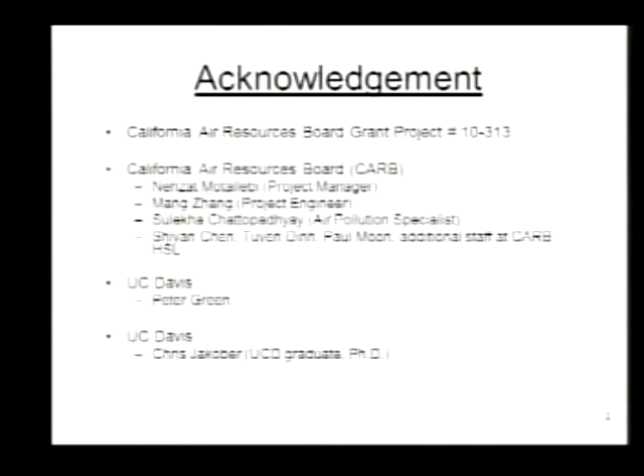I'm going to focus on results that have been published or are in the process of being published through this project. There are 7 or 8 papers here. I'll focus mostly on the results from paper number 4, but I'll touch on elements of some other papers as well — I just can't stuff it all into a one-hour seminar and do it justice.

Some of these things, obviously, my colleagues would be better suited to give the seminar on than I would, so I'll defer to them on questions about the details of the AMS, although I will touch on some of the interesting issues that came up with that technique as we go through this.

Just by way of framing this — I think everybody here is pretty tuned into this, but maybe some folks on the net would benefit from a little background. There's been work in the past decade looking at the volatility of primary organic aerosol. The idea is that primary organic aerosol is not rocks — it's actually semi-volatile material, perhaps. Especially if you measure it in very high concentrations, you push more of that semi-volatile stuff into the condensed phase. Back in the 90s, we didn't really recognize this about organic aerosols.

Glen's wisdom, and kind of genius in the whole thing, in developing the dilution sampler was that you try to get things down to ambient concentrations so that you can measure stuff with the normal ambient sampling equipment. That's actually something that has served us very well throughout many, many years of studies: don't study a system at industrial concentrations and somehow think you're smart enough to project what it means into the ambient. Try to get it as close to ambient as you can, and then measure it with the same techniques that you use for ambient — you'll skip a lot of complexity out of this.

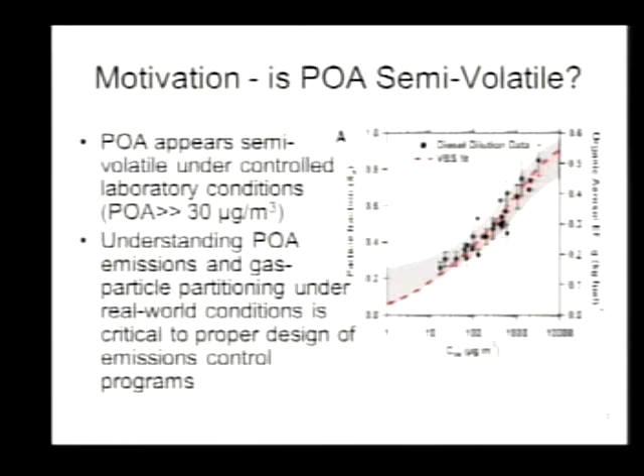So the question became: maybe all primary organic aerosol is semi-volatile, and you're just wasting your time measuring primary organic aerosol, period, and the game is all in the secondary phase, not the primary phase. We didn't think that was realistic. You can actually see the data kind of flattening out, and we had made a lot of measurements that didn't seem to go along with that theory.

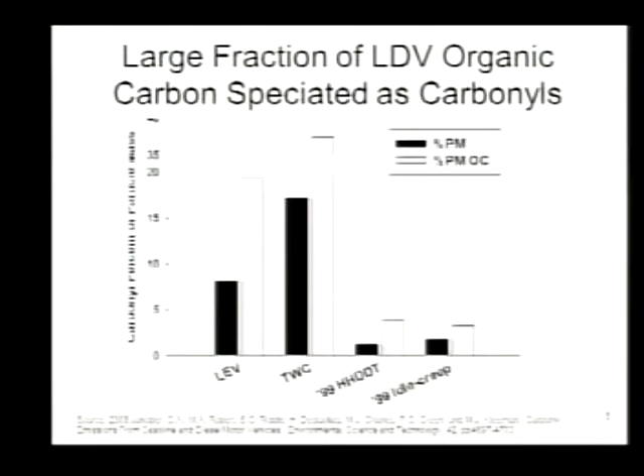So that was the motivation for this project. In previous work in 2002 and 2003, we were working at El Monte under ARB sponsorship, measuring emissions from motor vehicles. Lots of people, even in this room, were involved either directly or indirectly with that. We thought we could actually chemically speciate a significant fraction of the organic aerosol. We were working at pretty low concentrations, and we thought we could account for the chemical speciation of roughly 30% of that organic aerosol.

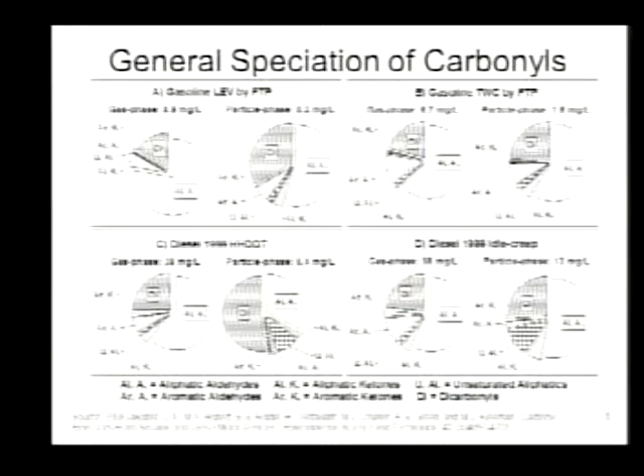When we looked at the chemical composition, it was a lot of oxygenated material: aliphatic aldehydes, dicarbonyls, some aromatics back then, but not as many. We looked at the partitioning of that, trying to think whether it would follow the absorption model where you'd expect it to evaporate. What we found is that it just didn't seem to follow the absorption model, period, let alone whether it would evaporate or not. It shouldn't have been in the condensed phase in the first place.

That suggested to us very strongly that absorption, at these low concentrations, doesn't explain what's going on. Perhaps adsorption, like a surface bonding process, or some other chemical speciation process was going on. Our best explanation for this result, with these light carbonyls being in the condensed phase, was that they don't exist in the condensed phase in that form. They're actually tied up in some equilibrium system where they form dimers or trimers or some other complicated structure. When we do our chemical analysis, we use a derivatizing agent that pulls everything back towards the building blocks, basically. So we can speciate it because we've pulled it back apart. It was really the more complicated forms that were in the condensed phase out of the tailpipe.

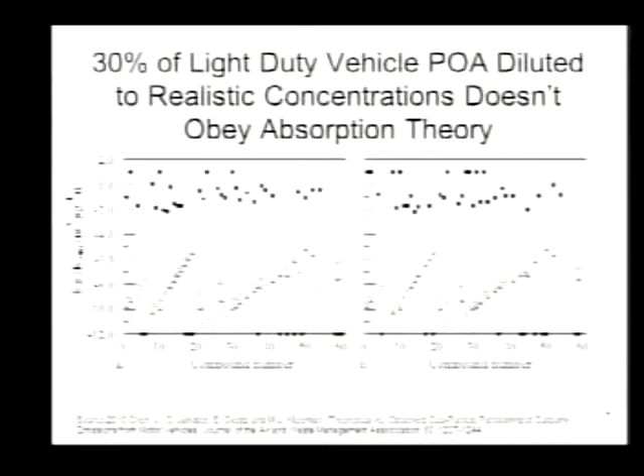So we wanted to test that theory and see whether we could recreate those results, get a lot of light carbonyls, find them in the condensed phase again, and then this time look very specifically at whether or not we'd expect them to evaporate under different conditions. That's the experiment we tried to design.

Now, that's hard because you're working at very low concentrations. People make measurements at 100 micrograms or a few hundred micrograms because it's really easy to measure stuff at that range. You drive it down to 5 or 10 micrograms per cubic meter in a dilution sampler, and suddenly you're running 30 FTP cycles trying to get enough mass. Nehzat remembers this - we just kept going day after day trying to get enough mass because we wanted a realistic dilution factor, but we still needed enough stuff to chemically speciate.

So it's detection limit challenges - those are really challenging experiments to run. But nevertheless, we think you really want to run your measurements close to where it lives in the atmosphere. You don't want to do some industrial chemistry measurements and then somehow think you know how to project it in the atmosphere.

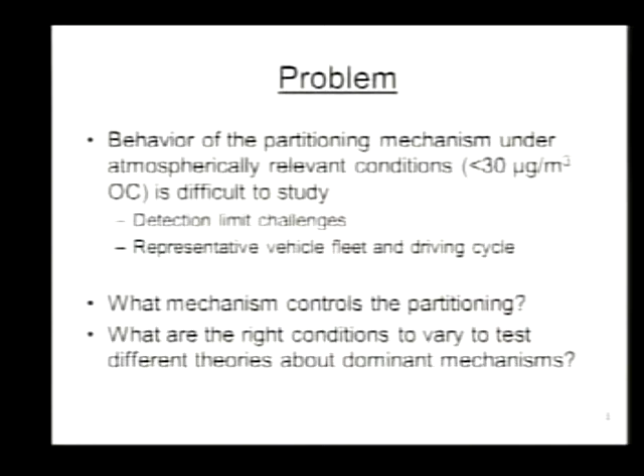So we really felt strongly we needed to get there. And then we wanted to understand what controls the partitioning. What are the mechanisms? Is it absorption? Is it adsorption? Is it chemistry? Or is it something else?

So the experiment we designed was to have a test matrix with 4 boxes. We varied the relative humidity and the black carbon content of the dilution air mixed into the samples. Before, when we did this, we just cleaned up the dilution air, made sure it's particle and gas free, mixed it with the hot exhaust, got it to close to an ambient concentration, and called it good.

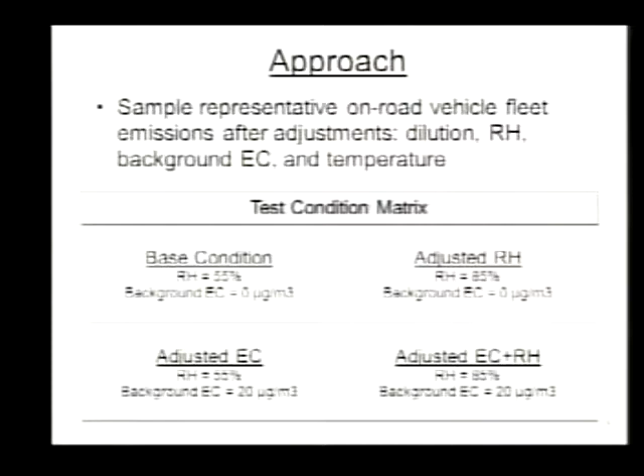But now if we want to understand the partitioning, we want to add some black carbon to that dilution air, provide some surface area for these things to adsorb onto, and see whether or not we pull more stuff into the condensed phase. Or perturb the humidity of the system and see if it cares about water. The other thing we were doing is varying the temperature. Every one of these 4 boxes also had multiple temperature measurements: ambient temperature, and 25, 50, or 75 above ambient, to watch how the system behaved. We were hoping that by varying these 3 things in concert, we'd get insight into what was going on with this system, and whether it's true that all this primary organic aerosol is going to evaporate at ambient conditions.

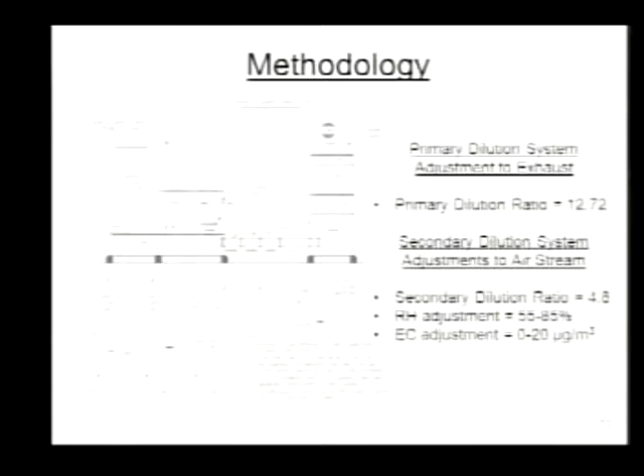We had a whole host of state-of-the-science equipment measuring what was happening at the tail end of this. We had the traditional denuder filter PUF collection measurements, followed by derivatization and GCMS - that's wet chemistry, pretty well established now. We had a high-resolution AMS system measuring this. We had a real-time photoacoustic measurement of the black carbon content. We had a real-time chemical ionization mass spectrometer to measure some of the gas phase, just trying to understand what was going on. So we really went in there throwing the kitchen sink at it, trying to hit it with everything we could, perturb it in interesting ways, and watch what happened.

And again, I can't touch on all these results, but I'll try to highlight the important bits for the storyline that I want to develop here.

This is just a picture of some of the equipment in action. On the left, you're seeing the denuder filter PUF systems. We use denuders in series to make sure we don't have any breakthrough, followed by the filter and PUF type measurements. You're seeing details of the car and the dynamometer. And in this right panel, you can see the flame generator - an inverted laminar flame generator to generate soot. We were trying to inject about 5 micrograms of soot, but we couldn't completely control the system exactly where we wanted it, so we ended up injecting about 15 or 20 micrograms. But that should only make it easier to see an adsorption effect where we're bringing stuff in.

And then we had some cascade impactor measurements as well. The left-hand side shows a MOUDI impactor that was collecting samples from the setup.

So again, this was an experiment we had done before, and we focused on low-emission vehicle technology. These cars were 10 to 11 years old at the time we ran the experiments, which actually matches pretty well with the fleet average in the United States - I think it's something like 10 or 11 years old. So we were pretty close to being relevant and realistic in this. Now, if you go out on a highway or in a tunnel, you'll see a much broader range of vehicles, and some of those emit pretty high, which can push things around. I'll get to this in the end in the recommendations. By no means do I think this is the exhaustive end of the study.

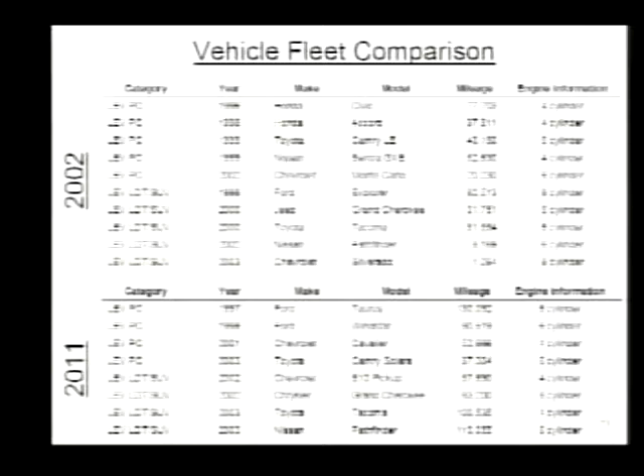And then the fuel changed. We still had MTBE in the fuel, I think, back in 2002, and we basically replaced that with ethanol. And you're going to see some of that change the Carbonyl Speciation later on. You can actually see that in the results. So, and I think it makes sense.

All right, I've kind of already run through the analytical methods, so I won't belabor that, but we had everything from the traditional to the very, very cutting edge and new, basically. Traditional stuff, not real time, and the cutting edge stuff, real time. Takes a year to invert the data, but you get real time information after you go through that process.

All right, so just to put things in context, when you dilute it down to ambient concentrations, 5 micrograms per cubic meter or less, what does the carbon look like being emitted from the tailpipe? So these are size distributions. There's particle diameter on the lower axis, and there's concentration of mass on the vertical axis.

The black is the elemental carbon. So it's the carbon, nobody's fighting about that. That's black carbon that is not volatile, it's not going anywhere, and it is the majority of the carbon in the system at realistic concentrations. If you leave this at 100 or 200 or 300 micrograms, that's a different story.

You'll see far more organic carbon per unit of elemental carbon in the system. But if you get it down to something that's atmospherically relevant, it's mostly already, that evaporation process has happened. The question is, does this last little bit evaporate? And that's what we're fighting about, or having a spirited conversation about, I should say.

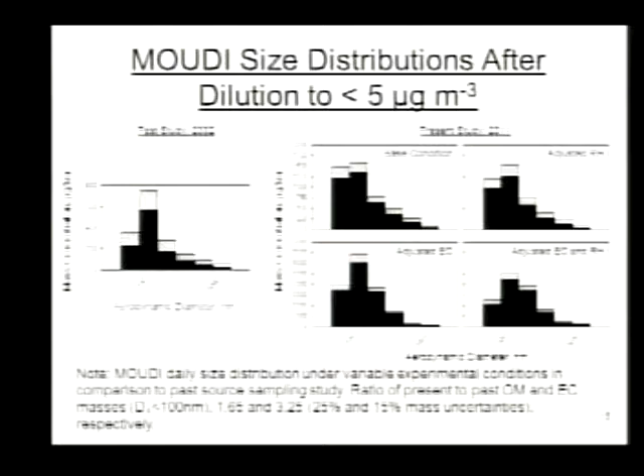So the measurements from 2002 on the left panel, and then the more recent measurements on the right panel, looking at the base condition, or the condition where we increased the relative humidity, or we adjusted the elemental carbon in the system, or we did both in the lower right-hand panel. And the story largely stays the same in terms of there's not a lot of organic carbon there to start with. The question is, can we push it around at all through these various modifications of the diluter?

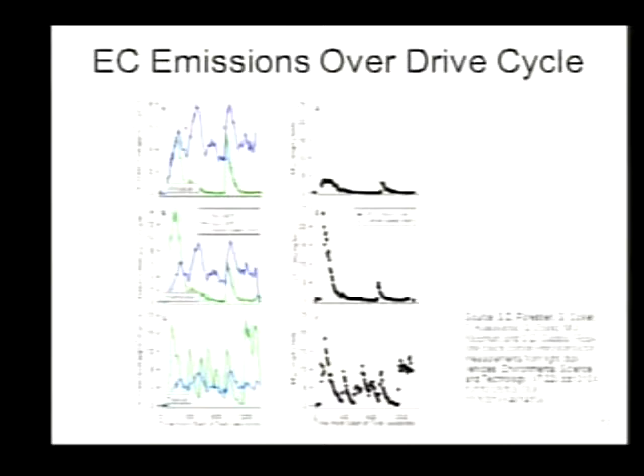Dynamometer tests are hard because you can't get a large fleet in there, and there's a lot of vehicle-to-vehicle variability. But you go out to a roadside or a tunnel, and you get a lot more vehicles, but they're all driving pretty much the same speed, same time—is that representative of what you're trying to look at as well? Everything has its strengths and weaknesses, and you should look at the weight of evidence from all the different studies before you try to draw strong conclusions about what's happening.

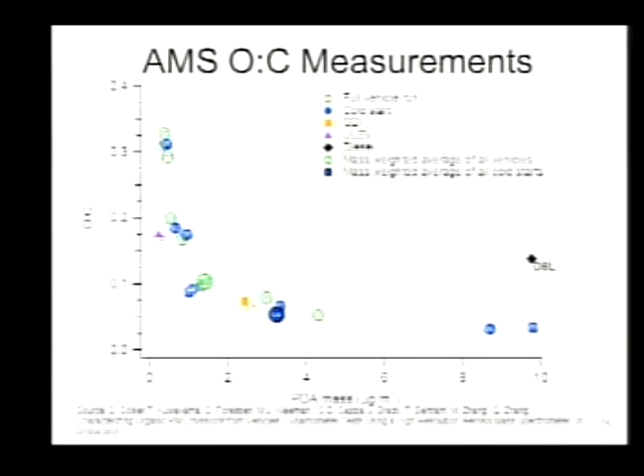We're definitely still trying to find all the important points in this data set, but this jumped out at me as something that was very interesting and relevant.

While we're talking about the AMS—this is an instrument that has sort of revolutionized our measurements of organic aerosol in the past years. These Van Krevelen plots, or various types of plots where you can look at the speciation and the real-time concentration with this instrument, have really drawn a lot of attention from the field, a lot of publications and effort gone into making these measurements.

One theory that hasn't been shot down yet is that the AMS defines organic carbon as anything that will volatilize after a few seconds at 600 degrees Celsius in their system, under vacuum. Anything that doesn't evaporate then is classified as not organic carbon. That's not how the traditional technique works—the traditional technique ramps the temperature in the EC-OC analyzer higher, like 800 degrees or so, before bringing it back down, then adds oxygen to the system to try to measure the elemental carbon. So there's a possibility the AMS is not able to measure what I call the very non-volatile carbon in the system, or not measure all of it.

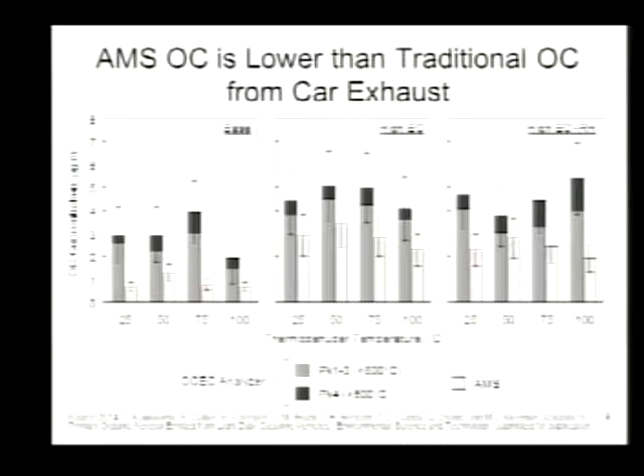Now, looking at this, the AMS crowd was quick to point out, well, maybe your measurements are wrong—maybe we're right and you're wrong. And I take that to heart; I have to consider that possibility. So we went around and tried to compare and cross-check everything that we could. We had measurements, you might recall, with that MOUDI impactor. A MOUDI impactor measures carbon using an aluminum foil substrate to collect samples. That aluminum foil substrate doesn't have a lot of surface area in it—you know, we're measuring with the quartz fiber filter.

That has a tremendous amount of surface area, and you always worry about positive adsorption artifacts of the gas phase vapor onto that. But we were running 2 denuders upstream of our quartz filters, so in theory the denuders would have stripped out all the gas phase material, and we wouldn't have to worry about this.

I think in an ambient sample, where you have a whole bunch of different sources contributing to the sample, it may well be flawless or close to flawless. From this particular source, it looks like it might have some issues. That's just a word of caution about how to interpret your results. It probably can be fixed - everything can be fixed - but it's just a question that needs to be looked at.

We actually worked this backwards, but I'll tell it going forward. So one of the things to understand is how did our fleet compare to their fleet in terms of emissions rates, if we want to understand what they measured versus what we measured. So what I'm showing on the left-hand panel here is the Carnegie Mellon fleet of 8 vehicles, or 7 vehicles, that they did their POA volatility experiments with. It's the natural, or the log 10 emissions rate on the lower axis for the different vehicles - this is like a distribution of how those vehicles looked.

The open bars in the background are results from the Kansas City study - this is a US EPA sponsored study out of Kansas City where they had a very large fleet and characterized the emissions from that very large fleet. So we were curious of where we stack up on this.

What you can see is that half the Carnegie Mellon fleet used in this study emitted more than 10 milligrams per mile, which is on the upper end of what US EPA characterized from a national perspective. We actually wrote a test plan where we would not allow a vehicle emitting more than 10 milligrams per mile into our fleet. So half the vehicles here we would have called high emitters and would not have allowed into our fleet.

Our fleet is characterized on the right-hand side, and you can see it's the same open bars, the same Kansas City national fleet in the background, but our vehicles fell into the lower third of that national snapshot. So you might expect we're going to get different answers because we started with very different vehicle fleets, and that's indeed going to turn out to be partially true in how we characterize this.

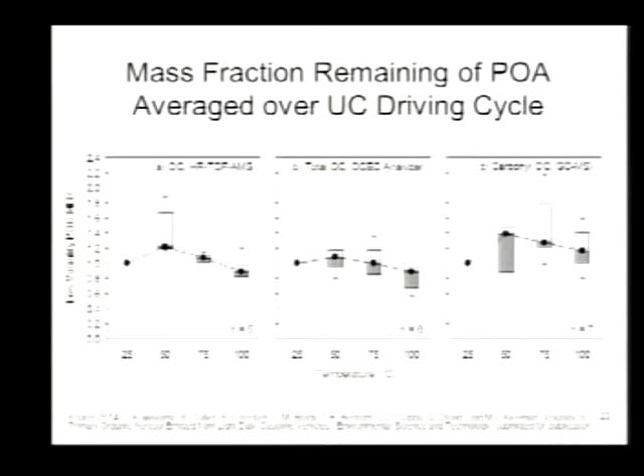Now this is a little bit misleading. We designed the residence time at that temperature based on previously published results, which turned out to be not very accurate or representative of ambient conditions. We probably could have benefited from a higher residence time in the hot temperature zone of this experiment. We're going to have to use models to project what would have happened if we'd left it at that hotter temperature for a longer period.

Before we do that, I want to look at results as a function of the driving cycle phase. We also have AMS results throughout that driving cycle. The UC driving cycle is about 20 minutes long, with cold start, accelerations, and so on. We used the first couple phases, so we know something about the cold start phase and about the later phases when the vehicle warms up.

The middle panel here is the AMS measurement of organic aerosol mass. A lot more organic aerosol mass comes out in the cold start portion of the driving cycle, then things settle down, but not to zero in the hot running portion. Then looking at mass fraction remaining at the four different temperatures from those different phases, you can see the particles look more semi-volatile during cold start than during hot running. There are probably some composition changes that explain that, but basically during cold start those particles are more amenable to evaporating than during the hot running portion of the driving cycle.

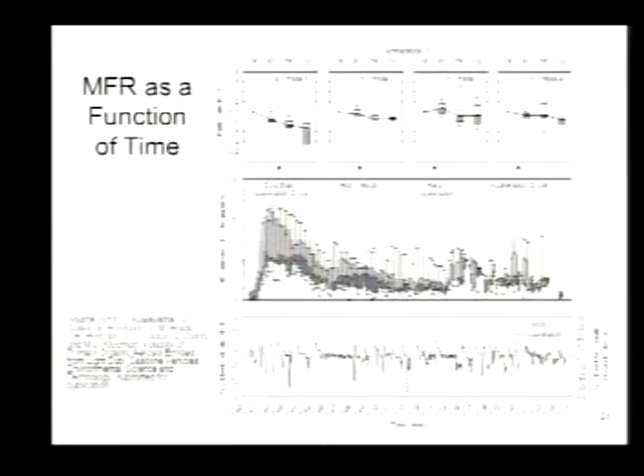All right, so we're going to try to model this now. One of our goals was not just to observe it, but to put a framework around it for how we can explain it and how we might put it into regional models. So what's the kernel of that? Well, a lot of the community has been trying to describe aerosol volatility with the volatility basis set.

You describe a whole series of different particle volatility bins—some very semi-volatile material, some less volatile material, and so on, a continuum of possibilities. The material that appears at the far right side of these plots, where C star is very, very high, is very semi-volatile material.

It wants to be in the gas phase more than it wants to be in the condensed phase. The things that appear at the left side of this plot at low C star values is very low volatility material. Chris is laughing at me because I made him express this as one over KP for about 3 years, but it's the same thing. So I'm converted now. I'm using C star.

So you've got a description then of whatever source that you're looking at. We're going to try to explain our data using not one volatility basis for the primary organic aerosol, but 2, because we think that there are 2 different types of organic carbon being emitted from this vehicle. And it's not hard to guess.

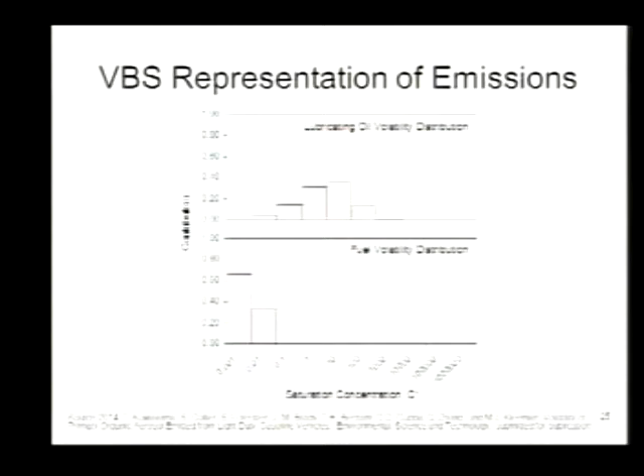So what we're going to see is that our representation of that volatility distribution involves some very, very low volatility material, which we think is fuel combustion products, and then we have lubricating oil, which has been measured sort of independently. Its volatility basis set has been measured, and this is how we're going to try to explain our data.

So when we do that, we get a picture that looks something like this. So this is the different temperatures, again, on the lower part of the plot, and then the mass fraction remaining on the vertical part of the plot. And I'm taking all the vehicles that we tested, and I'm making a box and whisker plot of them at each temperature. So that's what the distribution looks like at each temperature.

And we're trying to see how well the model is able to recreate that. The 2 lines are what you would get if you use the Carnegie Mellon sort of representation, a single volatility distribution to represent the results. And depending on the assumptions that you make about the particle surface area, the particle diameter, the residence time, and blah, blah, blah, you can get either the blue line or the red line. It sort of changes a little bit, but your answer is somewhat in the median there.

And you would anticipate then that you could get almost complete evaporation of that material as you go to hot enough temperatures. What we sort of focused on in our reanalysis of this data, our measurements using that Carnegie Mellon single volatility distribution model are on the left. Reanalyzing the Carnegie Mellon data is on the right. You get the same sort of picture out of this.

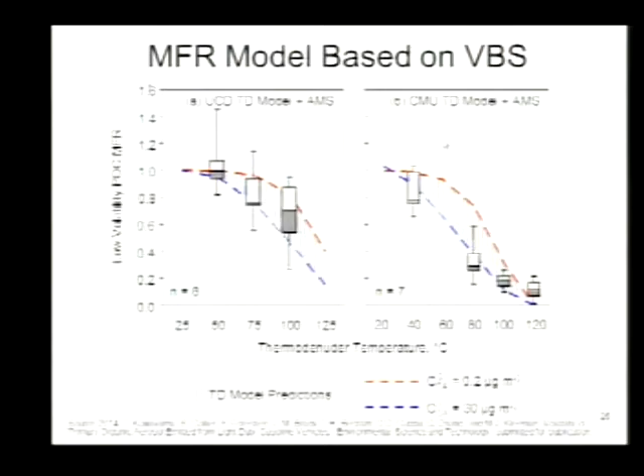But what we focused on was that model doesn't do a very good job of reproducing the scatter. Yeah, that might explain what the median vehicle does, but there is no median vehicle. We cannot explain the scatter in the data with a model that uses one volatility basis set to describe the POA from tailpipes. And so what we ended up doing is using our 2 volatility basis set, and that worked a lot better.

And the easiest way to sort of quantify or describe how much better it worked is just to draw the mass fraction remaining that was observed versus the predicted mass fraction remaining using a 1 distribution model or a 2 distribution model, and look at R squared. How well does it recreate the data? If you use a 1 distribution model, which is shown here on the left-hand side, you get an R squared of about 0.52, which isn't so hot, obviously.

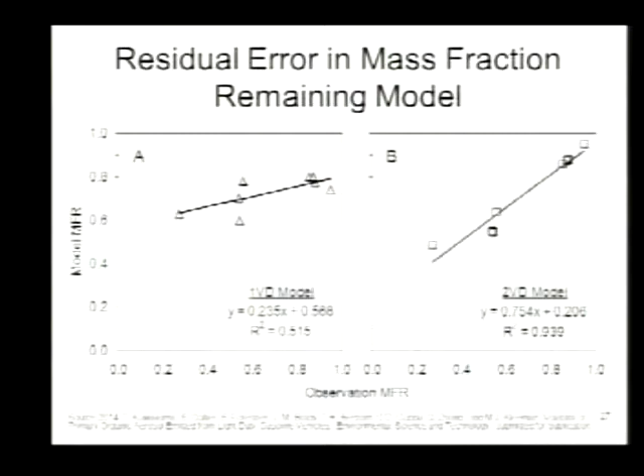If you use that 2 volatility distribution set, you get an R squared of about 0.94, which starts to look a little bit more convincing in terms of what's going on. So you cannot capture the full range of behavior for POA volatility with a one volatility distribution model, basically. And that comes out in the vehicles as well.

The interesting bit, why do we get 0.94 and not 1? Well, it turns out that in some of these experiments, as you heat the aerosol up, you actually get more organic carbon in the condensed phase, not less organic carbon in the condensed phase. And that does not jive with absorption theory at all. I mean, those models with the volatility basis set are completely partitioning models. There's no chemistry, there's no formation in there.

But in our data and in the Carnegie Mellon data, there's evidence that at mild heating, you're actually seeing more organic carbon in the condensed phase, not less. And that suggests very strongly that there's chemistry going on. You're heating things up, you're speeding up the chemistry of some of the reactions, and you're producing more condensed phase stuff out of that. And we don't get an R squared of 1 because this model doesn't have chemistry in it yet.

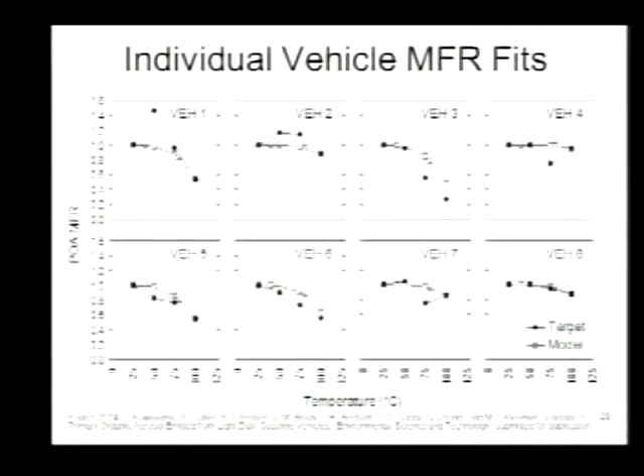And that's, the chemistry is that interesting bit. It's what I was saying before about maybe the carbonyls are building blocks, and you're putting them together somehow in that chemical system.

All right, so what does it mean then? Well, the interpretation of that, for our vehicles, is that a lot of them are emitting a mixture of fuel and oil, and it's hard to predict ahead of time which ones are emitting more fuel and which are emitting more oil. So rather than trying to predict that, I'm just inferring it from how volatile or not volatile their primary organic aerosol looks, and putting up the figure of how it comes out.

If you average everything, you'd get an average vehicle that would almost completely evaporate, left to its own devices in the ambient air. But that isn't how it's put together. It's not an average, it's extremes. Some are mostly fuel and some are mostly oil. And the mostly fuel ones are not going to evaporate under any condition. Or mostly fuel combustion products, I should keep saying that - it's not fuel, it's fuel combustion products. Fuel would be very semi-volatile, but fuel combustion products not so much.

And if you use the average or the median, you're going to get the wrong answer - that's the big take-home story. You need to recognize it's two separate different things. Now, what the fleet emissions rate looks like for these two separate things is an open question. That's one of my recommendations: people should look at other studies or make more measurements to figure that out.

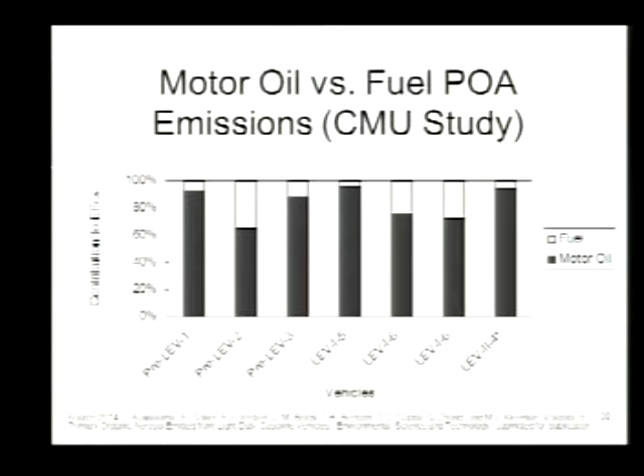Look at the Carnegie Mellon fleet. Remember, the Carnegie Mellon fleet ran a lot higher, orders of magnitude higher - above 10 milligrams per mile in that fleet. If you reanalyze their data, it's mostly motor oil. So they were emitting higher because they had higher oil emissions out of their vehicles. So yeah, it looks a lot more semi-volatile because oil is semi-volatile. But I don't know whether that's representative of a fleet or not in California.

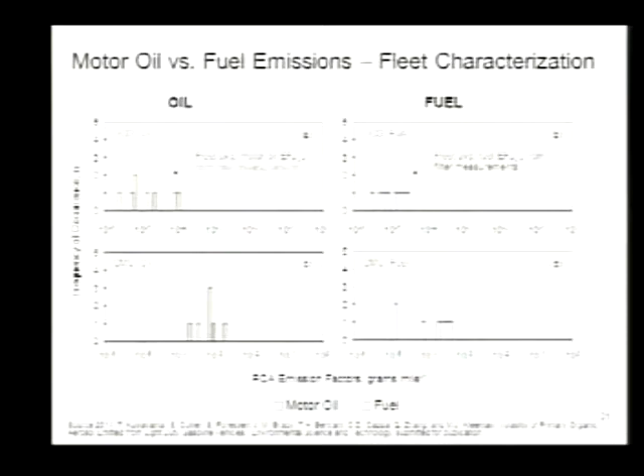Okay, so what is this stuff, this fuel combustion product? And this is where we're getting more and more speculative. We find these carbonyl building blocks in the condensed phase. I call them building blocks because they wouldn't be there natively. You're talking about stuff that's so light, there's no way that under a normal partitioning mechanism it would go into the condensed phase. It's got to be there in some chemically more complex form that we can pull apart when we dump the derivatizing agent into the sample and try to stabilize all of it. We're actually pulling it back through some equilibrium system. Our theory is that the chemistry has an irreversible step in it some ways, and once it crosses that step, you can't pull it apart anymore.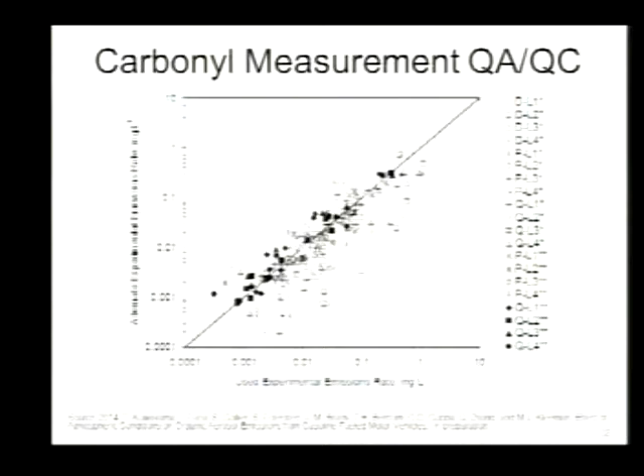But anyway, let's go look at some of those building blocks and try to see how far we can get with that. So this is just QAQC - we measured it twice under similar circumstances. Do we get the same answer? And by large measure, we do. So that builds some confidence.

And then we want to look at how much of the organic aerosol is made out of this stuff. Last time, depending on the vehicles we tested and the drive cycle we used, we got something between 18 and 30% of the organic carbon back in 2002.

This time when we did the same analysis, it's again significant numbers. So 13 to 40% of the organic aerosol that we measured on that filter, we believe, is composed of these carbonyl building blocks. That's pretty significant.

The speciation changed a little bit this time, though. The upper plot shows the 2002 measurements, with aliphatic aldehydes being the biggest single category, shown in polka dots, and dicarbonyls being the second biggest category. Back in 2011, aliphatic aldehydes were again dominant under all conditions—the base case, high relative humidity, high EC, or high EC plus relative humidity. But the second runner-up changed: instead of dicarbonyls, it was aromatic aldehydes coming in number 2.

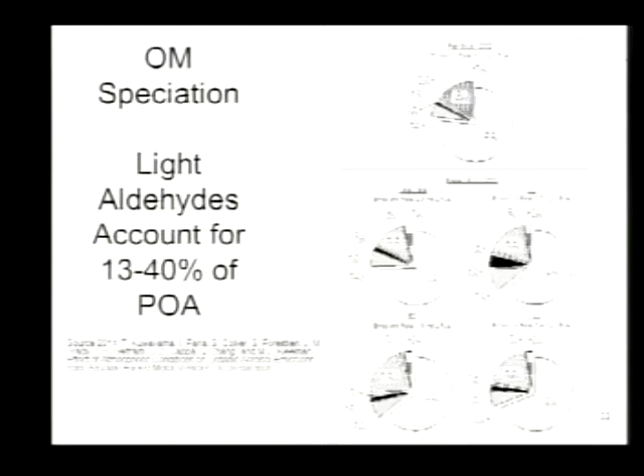It tells a little bit of an interesting story. If you look at the total aromatics in the left-hand panel—2002 is the first two bars, 2011 is the second two bars—the fuel is the first measurement, a box and whisker plot of all the refinery data in California. The aromatic content went up slightly between 2002 and 2011. Slightly—obviously those error bars overlap—but the median did go up, and the extremes are higher in 2011.

The particle phase aromatic content, the aromatic aldehydes, jumped considerably more than the fuel did—it went way up. That total aromatic content has benzene and a whole bunch of other things in it, although we don't use as much benzene now. Maybe not all that stuff is what makes these aromatic aldehydes—maybe it's only a subfraction, which is why you see the magnification in the condensed phase aromatic aldehydes. I don't know, we don't have enough data to know for sure, but it's interesting.

The other thing we looked at was the MTBE shift to ethanol, and we think that's driving some of this as well—the dicarbonyls going away, and the aromatic aldehydes becoming the second largest fraction of the aldehydes here.

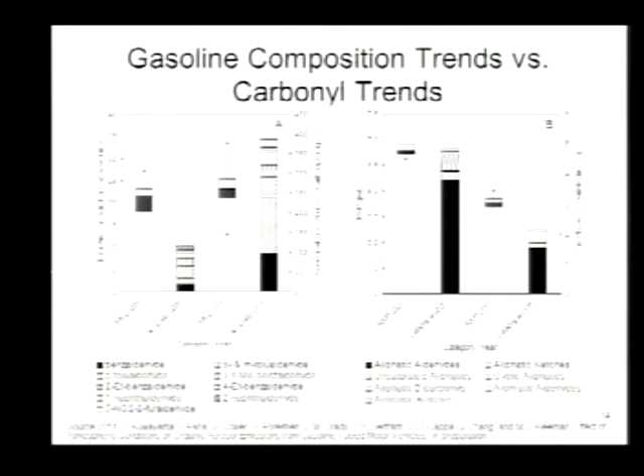So it's interesting. Now, does this have health effects? I don't know what the health effects are of any of this stuff, but the composition changed, and that's not just composition a few of us breathe—it's composition that all of us breathe. We all take a walk at night with our kids beside a road. So everybody, we just ran a pretty big experiment when we jumped from MTBE to ethanol that maybe we didn't realize we were running. You change the composition of the fuel, you're changing the detailed chemistry of the particles that people are breathing, and I do not know what the implications of that are for health.

All right, so what did we measure? A lot of light aliphatic stuff—propanal, little building blocks that would never in a million years partition there by absorption theory. We're measuring high concentrations of those in the condensed phase, so we're pretty sure it doesn't exist as propanal or these other light compounds in that phase, but is tied up in dimers, trimers, whatever is put together in the condensed phase out of these building blocks. Our chemistry is just pulling it apart when we derivatize it, until you cross that irreversible step, at which point it looks very low volatility and you can't pull it apart anymore.

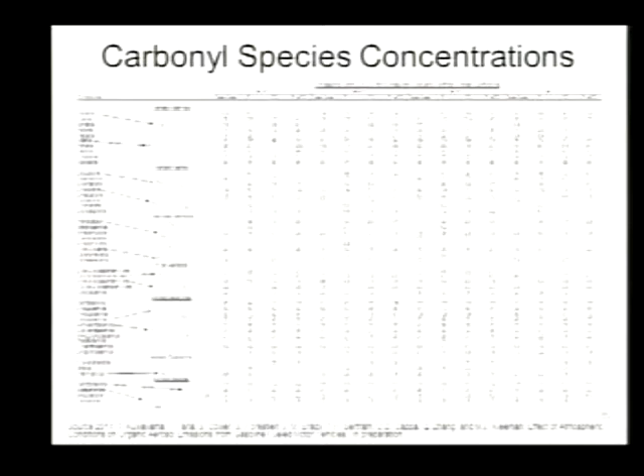All right, so the interesting bit—I haven't talked much about the effects of our different experimental conditions. It turns out that humidity pushes the answer around. If you look at the different things we varied—relative humidity, elemental carbon, elemental carbon plus relative humidity—across the board, the thing that jumps out well above the base case bar is that humidity matters.

And what that suggests is that there's some sort of aqueous chemistry going on that is influencing the production of these carbonyls.

You add more water to the system, provide more reaction volume, and you end up producing more total gas plus particle phase stuff of this.

When we added the elemental carbon, we started to see evidence that maybe we're scavenging some of the precursors out of the system. One theory going in was that the elemental carbon, the black carbon, would provide more surface area, and you'd get more compounds going into the condensed phase. At least for the ones we're detecting in these carbonyls, that didn't seem to happen. It looked more like the black carbon surface area is soaking up the precursors for that chemistry and shutting it down.

Remember, instead of dumping 5 micrograms in under controlled conditions, we dumped 15 or 20 micrograms in, so we kind of flooded it with black carbon. I don't know whether it would still dominate at the lower 5 microgram level, but it seems like a plausible explanation for the trends we see in our data.

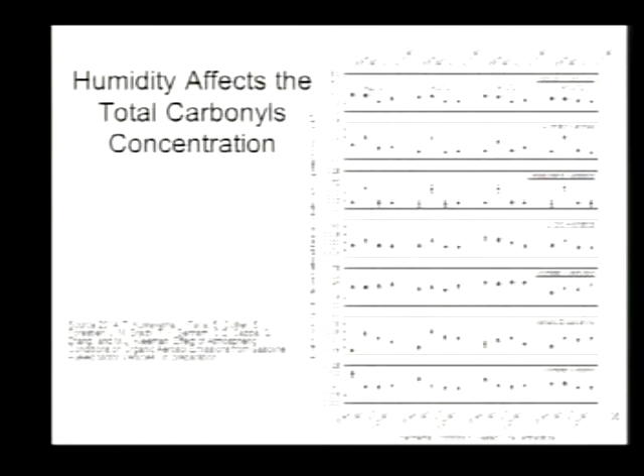You're also seeing the carbonyl speciation change a little bit under the different conditions - high relative humidity, adding black carbon, or adding black carbon and increasing relative humidity. Not dramatically though - in no case do we ever see the aliphatic aldehydes not dominating the signal. But we do see certain things appear above detection limits that weren't there before, when we start manipulating some of these experimental conditions. We're still staring at this data, trying to fully understand it.

The project ends for ARB, but we sit there and stew on it for another couple of years, and papers will still appear. So it's going to take us a little bit longer to wrap our heads completely around what all of this means.

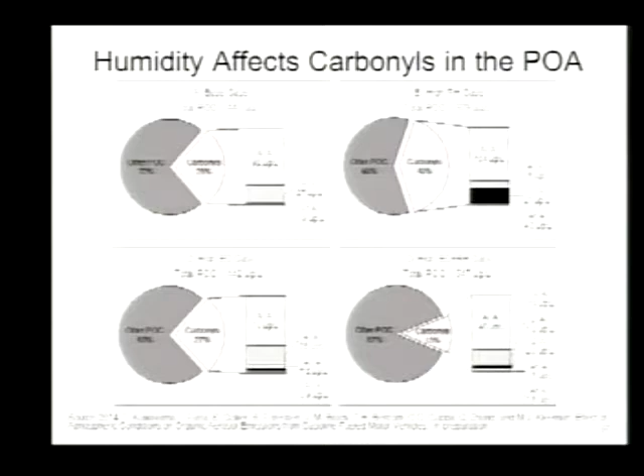But we observe that the experimental conditions matter. This system is not chemically inert. All we're doing - this is at the end of the tailpipe, we're mixing dilution air with it - the chemistry is not frozen. It's not just partitioning that's happening; there's active chemistry going on. You change the conditions, you change the chemistry. I think that's very clear from these measurements.

I'll gloss over that just to get to the next phase. The real-time gas phase measurements were kind of interesting because they could measure the cousins of things we were measuring in the condensed phase.

I said propanal was a big hitter in terms of the carbonyls we observed in the condensed phase. Well, it turns out if you continue reacting propanal, you get propionic acid - you make the acid form out of the carbonyl. And we could measure that with the real-time CIMS, the chemical ionization mass spectrometer.

So what you're looking at in this figure is a time trace during one of the drive cycles of propionic acid, shown in black on the left-hand side, as a function of the driving trace. And what you can see along with it is the concentration of NOx in the system as well. They're almost dead spot on in terms of the time trace. So clearly the chemistry that forms propionic acid is somehow related to the NOx concentrations in the system as well.

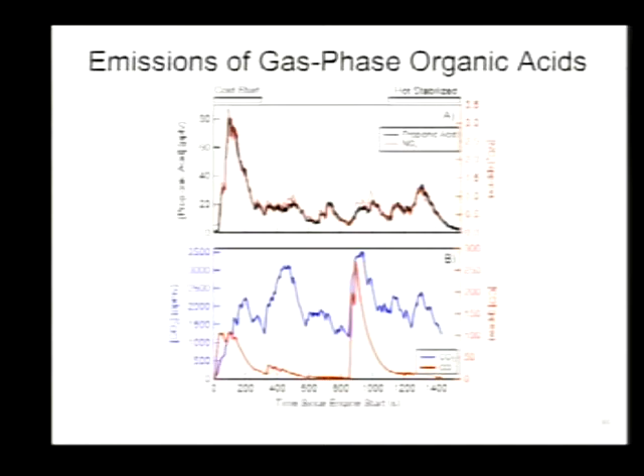We think it's kind of interesting to think about that in relationship to what's going on with all these light carbonyls that we're seeing in the condensed phase.

I mean, who could have ever imagined doing this with traditional wet chemistry? There's really nifty things that come out of it. But you shouldn't skip over the step of comparing it to the traditional techniques or gloss over the problems when they happen. I think the AMS is teaching us that yeah, it's great, it's a gee whiz instrument, but really look at it skeptically until you understand the strong points and the weak points of it. But there's clearly tremendous stuff that you can do with these measurements.

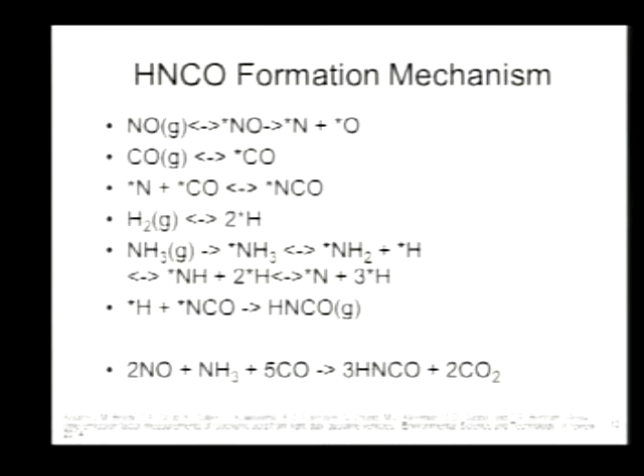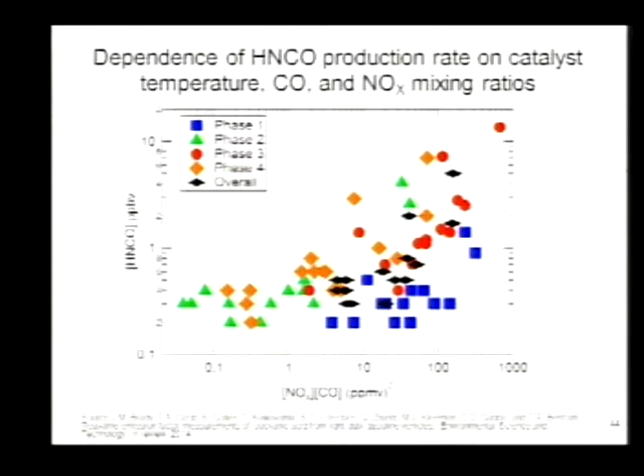All right, and that just shows you the dependence of the HNCO production on the CO and NOx mixing ratios. The idea is that when you have a lot of CO and NOx, you're going to make more of this stuff, and when you have not very much of it, you're going to make less of it - again, because of the chemical mechanism.

All right, so what conclusions do I want to try to draw from all this? Well, we think that POA for motor vehicles is not one thing. We think it's 2 things. We think one of those things looks a lot like motor oil, behaves like motor oil, and is pretty semi-volatile. It will evaporate. But the other thing is not semi-volatile at all. It's very non-volatile. We think it's a fuel combustion product. We suspect it's made out of carbonyl building blocks - that's a little bit up in the air yet. But it's not going to evaporate. And we should expect that in our model simulations, basically.

We're going to have to build a statistical distribution from this, either through tunnel studies or some other techniques, characterizing a bigger fleet of vehicles using these temperature volatility techniques to understand it and what the fleet looks like. Our preliminary look at 8 what we think is representative vehicles suggested 50%, but that's pretty wide error bars on that. I would believe 60, I would believe even 80. I probably wouldn't believe 99. But there's a lot of variability in there, but I think we know enough now to know what to look for when we go back to characterize the fleet.

The chemistry in the system is active. You change the relative humidity, and you're going to change the carbonyls in the exhaust. So the chemistry is still ongoing, and I think that needs to be recognized. It's not just partitioning. There's active chemistry happening in the exhaust of the vehicles.

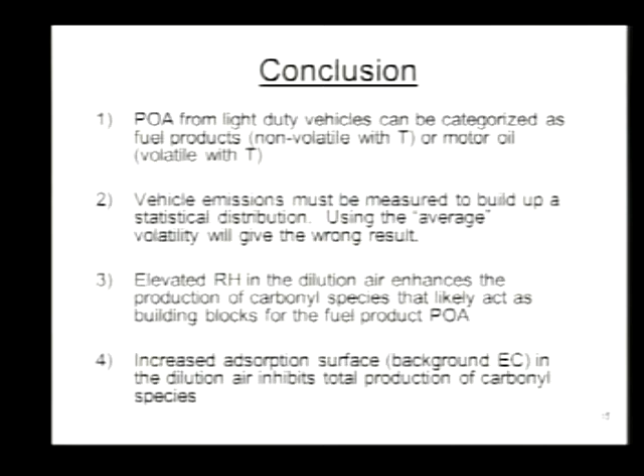And it looks like the increased surface area of adding black carbon to the dilution air did not enhance the POA emissions. In fact, if anything, it suppressed it because it looks like it scavenged gas phase precursors. We don't see a significant enhancement. So adsorption on EC is not explaining the POA formation. It's some sort of chemistry that's happening, just the normal thing that happens to motor oil.

So what are the implications of that for modeling? I'm looking at Ajith when I say that. Well, actually, I've got to look at the whole back corner there.

So if you went in with a median volatility distribution, one volatility distribution to explain what's going on, it's probably going to be semi-volatile enough to evaporate completely, and you would predict no POA in your model. If you go in with two, the motor oil part of it is going to evaporate, but the fuel part of it is not, and it will not go anywhere. So we think it's really important. This has implications that need to be recognized in regional modeling.

The other thing I wanted to have a little food for thought on is that there was a lot of SOA measurements made by the Carnegie Mellon Group the last time they were down there. These were some of the vehicles that they measured. Not all of them, they measured a lot more vehicles, but these were some of the vehicles that they measured.

I'm submitting that the POA emissions rate from these vehicles are not very representative of the California fleet. I put it to you, how representative are the SOA formation measurements from those vehicles? And how do you interpret those?

As I said, Carnegie Mellon measured a lot more vehicles than this, and they have individual data from individual experiments. But I think you might want to be cognizant of the emissions rates of the vehicles when you look at that data and decide what you want to put into your analysis. Because I don't think that every vehicle they measured those SOA emissions rates for is truly representative.

If Alan's watching this on the internet, he might just roast me on this, I don't know. But I believe that's honestly a fair observation, that those vehicles emitting more than 10 milligrams per mile maybe are representative of the California fleet or maybe not. I don't know. But it's going to matter for primary, and it's probably going to matter for secondary as well.

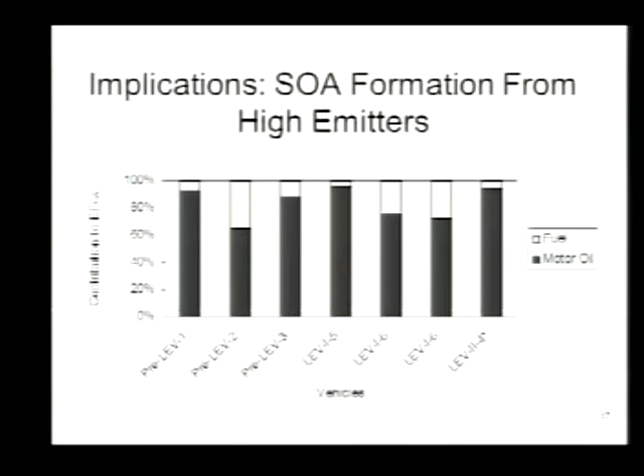I don't think you will get the same amount of SOA formation out of those vehicles as you would with others. So my recommendations based on all this: we need to characterize a larger fleet, whether it happens with tunnel studies or more dyno studies or both, to try to build a weight of evidence. We need to characterize more vehicle emissions.

We probably should try to explore the chemistry a little bit more to understand how those carbonyls are there, why they're there, and whether they're truly related to this non-volatile organic aerosol formation, and how that chemistry works. What is that irreversible step?

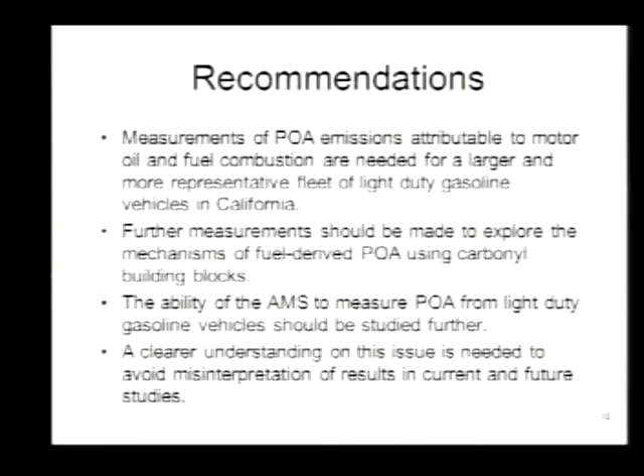The AMS measurement of POA from motor vehicles, at least, looks like maybe it has some issues measuring the high volatility material, what the traditional community calls organic carbon. Maybe we should just redefine organic carbon to be whatever the AMS measures. I don't know. But there's a difference, and it's important to recognize that there's a difference. We definitely need a clearer understanding of that if we want to interpret AMS measurements in the future. So with that, I will end.